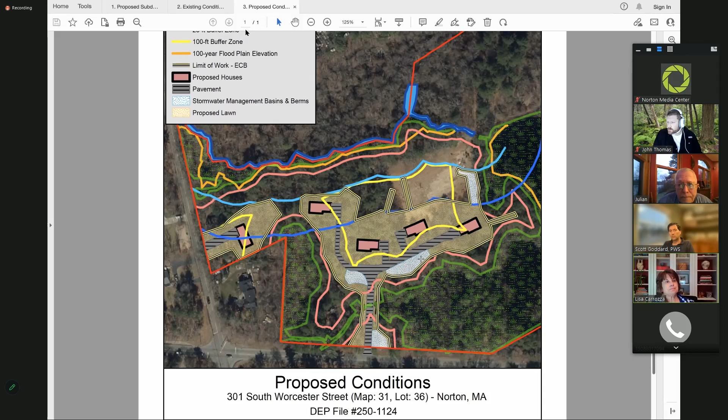Okay, when you calculated, so if you go back to the first sketch, when you did the riverfront, I'm just curious as to what's going to happen to that existing house. I'm sorry, go back one more.

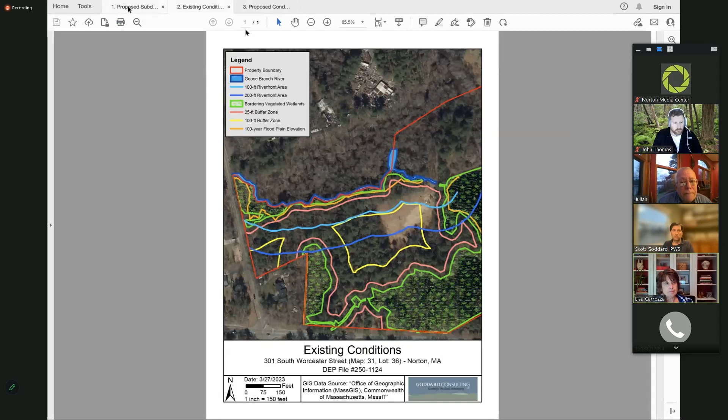So does the riverfront area extend onto that remaining lot? So this is where Goose Branch River extends, and it would kind of follow this general path of my cursor. If this little spur right here is also a river, a riverfront line would come around like this and then probably go like that. So you'd have this portion of the site as riverfront area, but it's also largely all BVW in there as well. So, in the end, what I'm looking for...

Yeah, no, that's a fair enough observation for sure. So we'll take a look at that and include some comments about that with our responses. All right, and I would ask you to look at the grading on the Dean Street lot.

It seems like the house is fighting the grade, and it seems like the house wants to be rotated. There's an obnoxious amount of grading, fill, looks like. So you might want to go to the engineering plan if you have it, and just take a peek at that. And then if there are any provisions for snow storage, I'm not seeing the civil plan, so I don't know.

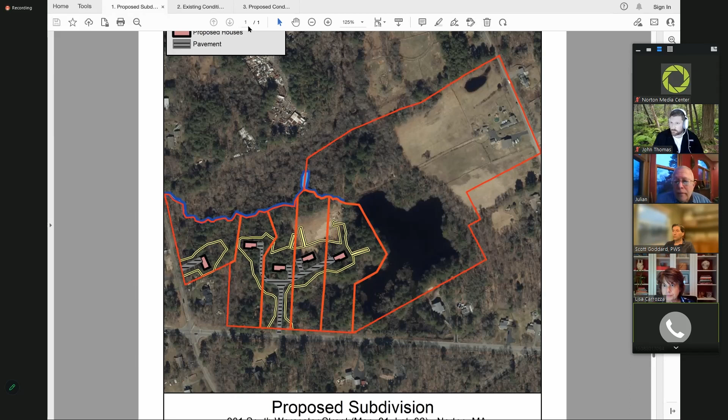And of course, there will be opportunities to ask questions when there are more details available and the civil engineering plan is available, so we can see more in detail about the construction around the houses. Well, so we have that. We could show it tonight, Mr. Chairman, but I just don't know if that's going to be a good use of everyone's...

Seeing no continuing questions, obviously there's more information that needs to be presented, and is that a reasonable time for this to be continued to? I'd like to schedule it for then, and if it turns out not to be, we'll request a continuation in advance of that. But yes, please continue to April 10th.

Okay, so unless there are further questions, we can go ahead and entertain a motion for the continuation of this public hearing. So moved. Second. Okay, so we have a motion from Ron and seconded by Lisa, and we'll begin with a roll call vote, starting with Mark and Ron. Aye. And then we have Lisa and Dan. Aye. All right, and I'll throw in an aye, so this hearing for 301 South Worcester Street, DEP number 250-1124, is continued.

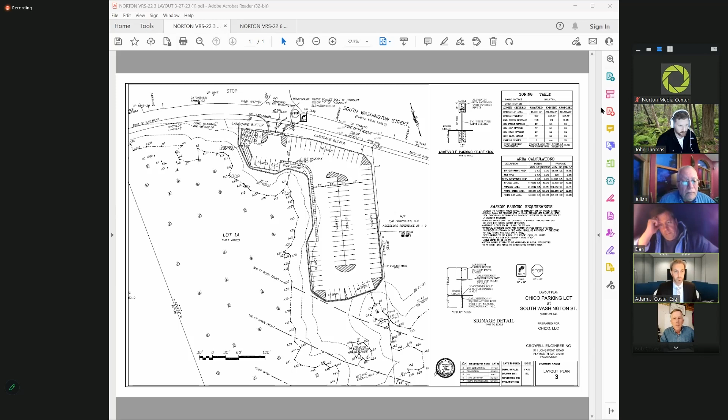So Bob, do you have the ability where you are to share your screen? I don't, I'm actually using my cell phone. Okay. Can you see that, Bob? Yes, I can. Okay, all right.

Let me know if you want me to move it or zoom into any particular areas, and I'll try to do my best to follow along. That's fine for now. There were about 13 points that John made, he sent it to us, and I'd just like to run down through them. Over half of them were regarding the wall, and the first thing was the wall details are now shown on sheet 9, and I think it pretty well shows how the wall's constructed. It shows the details, and I just want to say that.

Can we go to the grading plan while we're looking at this? We're looking at this in one dimension, we need to see the grading plan in the context of the wall. Okay. The grading plan is sheet 4. Okay, thank you. And Bob, can I confirm, I know you provided an updated version of sheet 3—the other sheets are all the same.

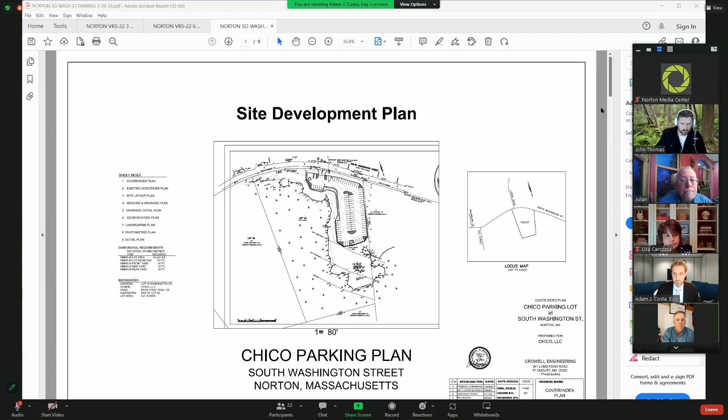Okay, go to sheet 4. Sheet 4 shows where the wall is.

Previously we were in the riverfront area. We have pulled the parking lot out of the riverfront area, so we are not in the riverfront area now. The wall details are on sheet 9, we'll get to that. When the wall is designed as shown here and the project gets approved, it will be sent to the manufacturer, who has an engineer that will lay it out.

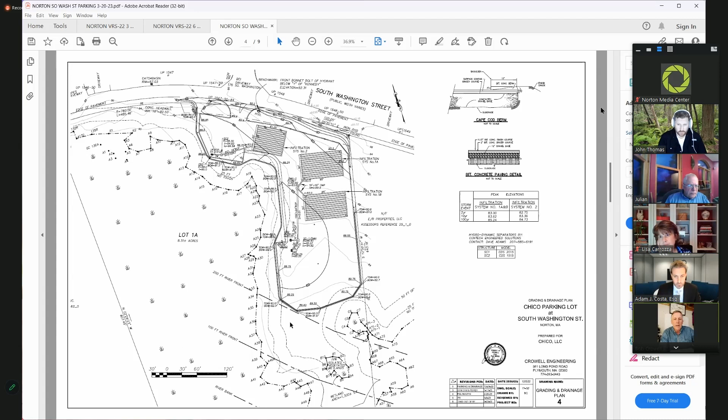Let's go to sheet 9, I can talk about that. Sure. It's the last one, there we go.

Where it meets the existing grade, and at the top is basically 12 feet in, and that's exposed to what you see.

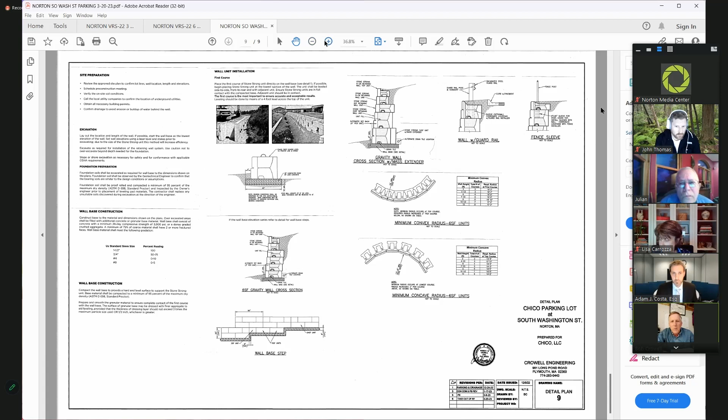Anyway, the building inspector requires a fence along the guardrail, and there's a guardrail right up against the wall, so the parking goes pretty close to the edge of the wall. There's a guardrail there, and where there isn't a guardrail, there's a fence, and they fit right into the wall. They make a space for the wall, set it in there, and pour concrete around it to hold it in place.

So this takes care of all the requirements that the building department requires. Any wall over 4 feet, you have to have a fence or this guardrail. So we meet the building requirements, and structurally it's sound. Again, when it goes back out, it goes to a structural engineer, and I will work with him to make sure it goes where it's supposed to go, and the radiuses on the curves are all good.

And I don't know if Al, if you're able to... Al, you're muted. Can you hear us?

Yeah, can you hear me now? Yeah, I can hear you now.

Normally, so when you do a wall, first of all, the wall is designed by a structural engineer through the manufacturer before we even start the wall. He tells us what block goes where in order to support the weight that's pushing up against it.

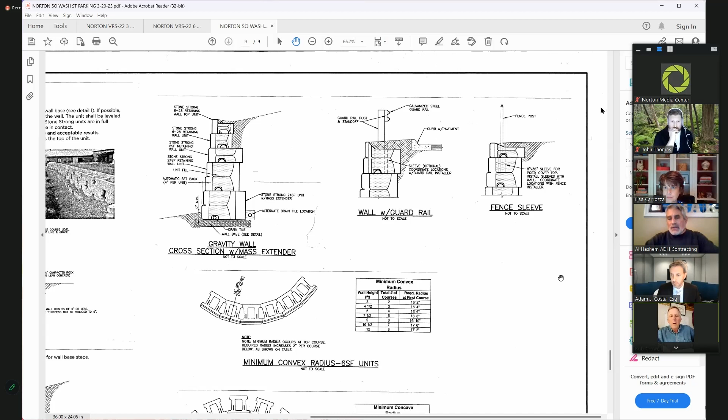Can I just pipe up on the east side of the property? We have maybe 3 feet between the property line and the edge of the wall, and that isn't an issue for you to construct it? No, not at all, because we'll be on the interior of the property as we work. We never go out near the wetlands at all.

We reach in with the machine. We only go 6...

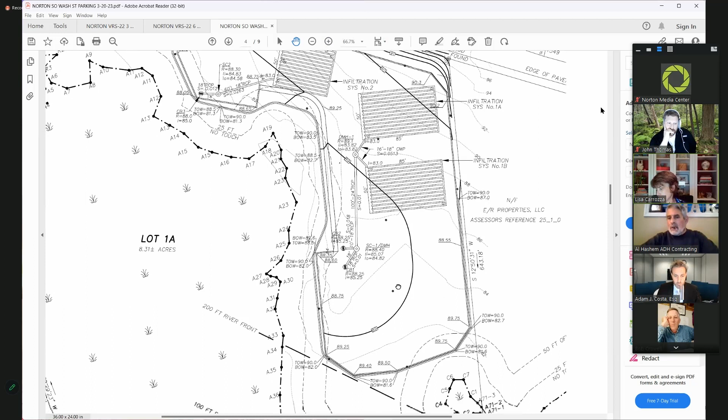While I ask this question, do you need any access on the exterior of that, for instance, for operations and maintenance? A footpath or anything on the wetland side of it? No, you will never, ever go down there for any reason.

Those blocks will never move. Those blocks weigh anywhere from 6,000 to 9,000 pounds apiece, and they're not going to move. We never maintain this, this wall is maintenance free. So basically all you're going to do is on the top of the wall, you might mow some grass at the very top under the guardrail, but that'd be about it.

There's no chance of the stone becoming dislodged and having to be replaced, so you don't need access on that side? Not at all. You'll never be down there for any reason.

We've done a lot of projects, Sullivan Toyota, 13-foot high walls, probably 600 or 800 feet long, and they don't have any problems at all there. There isn't a wetland situation like this, but they still have the parking area. None of those blocks move. They're pretty heavy blocks, that's the reason why this wall works, because it's so heavy. The blocks are heavy.

So I had one quick follow-up.

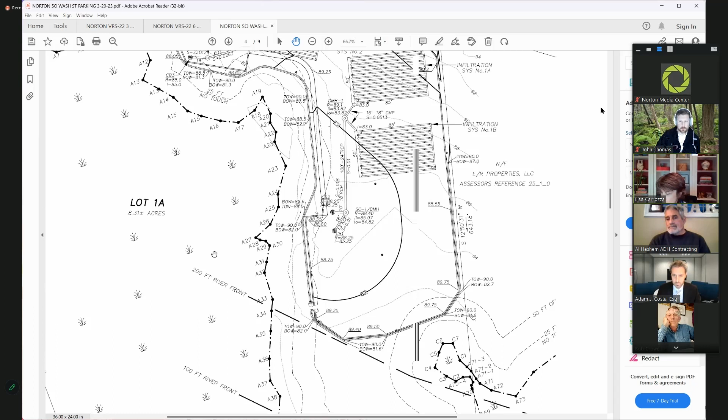In the southwest corner, there was approximately 1,200 to 1,300 square feet of encroachment of the paved parking lot area into the 200-foot riverfront. I watched the meeting on the 13th, and commissioners spent a fair amount of time raising concerns about that encroachment, suggesting it could maybe be eliminated, and discussing the difficult alternatives analysis required to establish that it was a necessity.

We're required to do this. You might remember when this project was first proposed, both to the Planning Board and the Conservation Commission, it was proposed with 155 and then 147 parking spaces, and we're down to 100 now. This is obviously an Amazon parking lot, that's no secret, and Amazon has indicated they can't go below 100.

So we've been trying to work with the parameters they provided in terms of minimum number of parking spaces, minimum width of aisle corridors, and turning radii, to try to fit this in. We were concerned we'd be unable to do that without encroaching into the 200 feet. What ultimately saved us, and Bob can speak to this better than I can since I'm not an engineer, is that a number of parking spaces toward the center of the site were EV spaces, with EV mechanicals that were going to be placed on the ground for those electric vehicles.

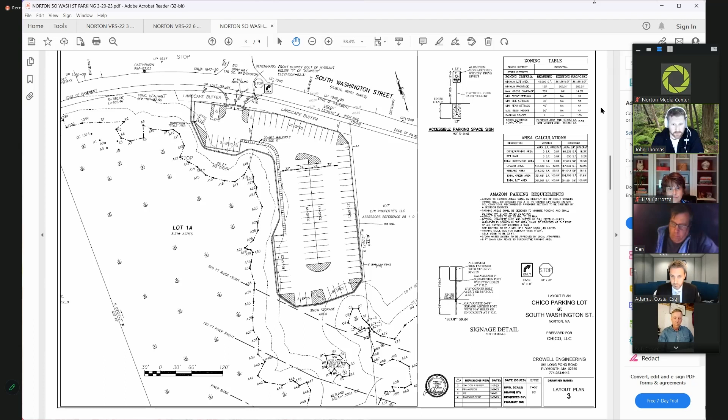So it appears to me this is the older plan. Is there any way we can share the newer plan that was just sent over recently? The newer plan looks just like this — this is now the newer plan. The only change on this plan, if you want to go to it, that's fine.

It just shows the snow storage area, and there's a snow storage area up around there — there it is. The snow storage around the dumpster area, and right in that area where he's circling, the snow storage area.

And that was an omission from our plans when we were last before you as well. We didn't have snow storage areas shown in these locations. We didn't have the dumpster pad either, which was a question I think by one of the commissioners. So that's been added as well.

Correct. And for what it's worth, Amazon has represented — and I think I'm going to get this right, but I know Barb Fitzgerald had the direct conversation and she's on the meeting tonight, so she can interrupt me and correct me if I'm wrong — but I think the representation, and I'm fairly certain I have it in an email in writing, was that Amazon intends to regularly use about 60 of these spaces.

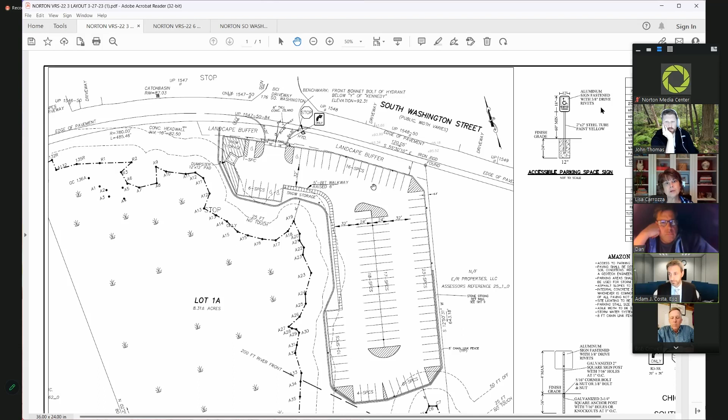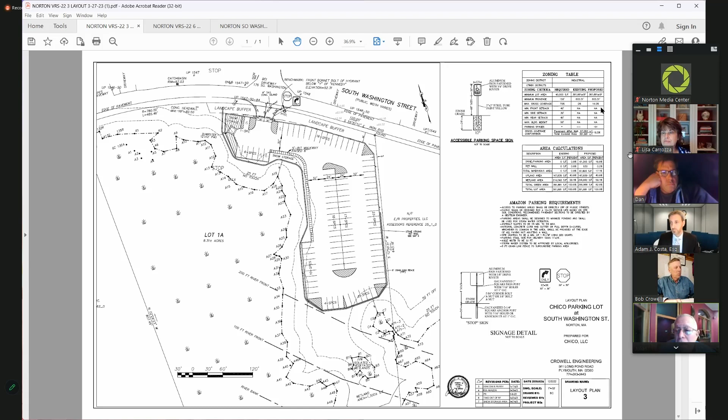Any further questions from either members of the commission or John Thomas? And if not, we can see if there are any questions among members of the audience. So the final decision—not seeing any questions—we can consider either to close, or to continue and then close next time, although I don't think there are any specific issues now to be resolved.

We're asking them for any additional information, John Thomas, is that correct? Yeah, they sent over some revised plans to me. I just need to know which sheets they revised. Sheet 3? Okay, it just showed the snow removal. I'll just make note in the order that sheet 3 was revised. Correct me if I'm wrong, Bob, but I think the only changes on sheet 3 were the addition of the snow storage, as well as the 4th handicap or ADA accessible parking space that the planning board had requested, correct?

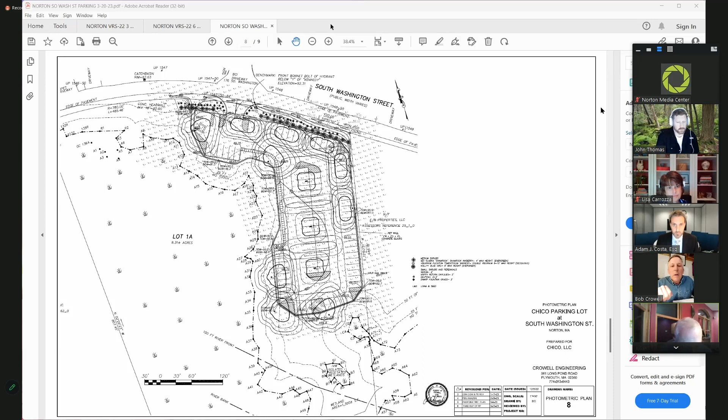Correct, yes. And I have a question about a sheet labeled sheet 8, entitled photometric plan, and I don't really quite understand what it is. It shows the light emanating from each light—photometric is like a topographic map. We need to get at least 1 foot candle of light on the lot, and so it shows how much light is thrown down onto the lot. That was the requirement under the planning board, was it not? Yes, it was. Typically the planning board will look at the outskirts of the property beyond the footprint, and you want to see all these 0.0 foot candles indicating no spill or glare onto adjacent properties. But internal to the site, you want to see a number that is at least 1, indicating sufficient illumination for public safety.

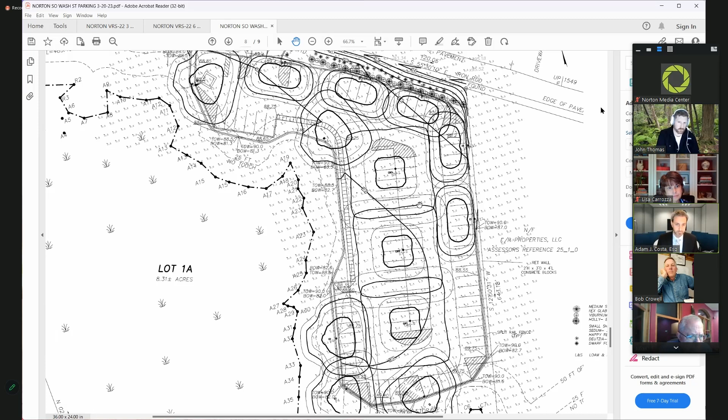All right, got it, thank you. So the final decision is close versus continue and close. Is there a preference? John, you would have an order of conditions ready regardless—I should have an order of conditions drafted up, ready for review by the commission at the next meeting. Well, we're not asking them for any additional information, so I would make a motion to close the public hearing for file 250-1119.

We have a motion made by Lisa and seconded by Ron. So roll call vote, beginning with Lisa and Ron. Aye. And Mark and Dan. Aye. And I'll throw in an aye, so the motion carries.

The hearing for file number 250-11190 South Washington Street is closed, and we will be deliberating about and voting on an order of conditions next time. Thank you, Mr. Chairman, members of the commission. Appreciate your time tonight. Thank you for coming in.

All right, our next item on the agenda is draft minutes for March 13th. I actually have an update. I received a request for a partial COC for 131 John Scott Boulevard, Megan?